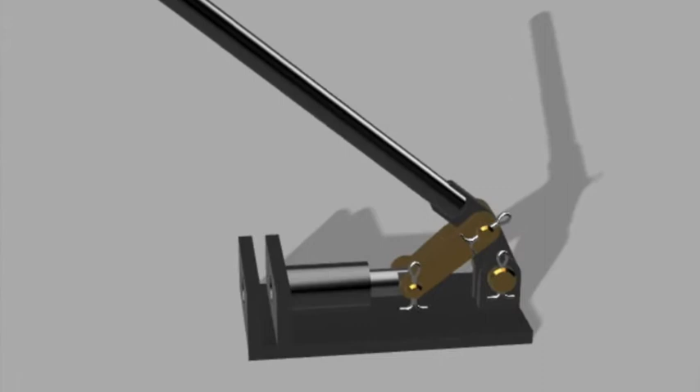To help us demonstrate this, over the series we're going to be modelling this punch mechanism, and in this video we're going to be looking at how to extrude the complex shape of the split pins.

We're going to start off by sketching our shape that we want to extrude. So we're going to select the XY plane. You can see by the grid on the background which plane we're looking at. So there we go, that's selecting the XY.

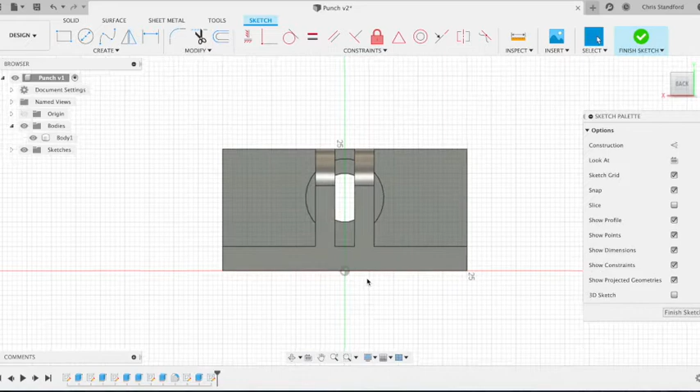For this split pin we're going to draw a 2mm diameter circle. Because it's such a small item we're going to zoom in so we can see it better.

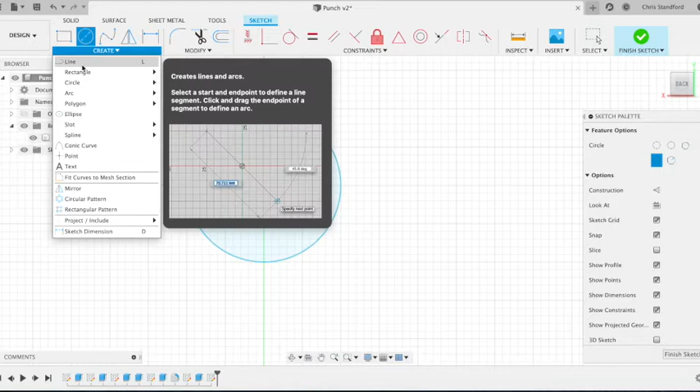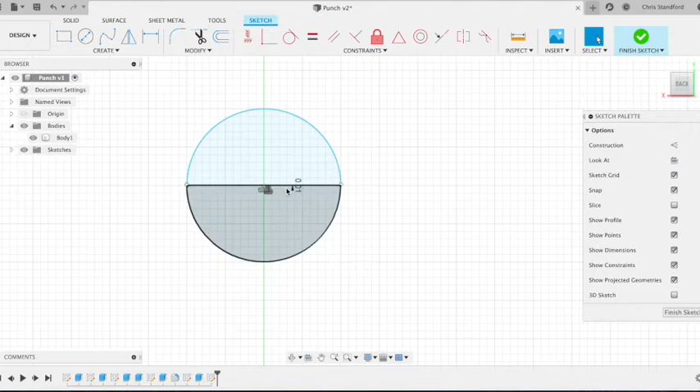And then we're going to split this circle in half. Once we have two semicircles, we're going to offset that center line by a very small amount, so we're just going to go with 0.01, a very small amount. And we're going to do the same on the other side. So if we offset again, we're going to offset that one, and we're going to go 0.01 on the other way now.

And we can finish the sketch, and what we'll have is these two slightly less than semicircles, and they're the bits that we're going to extrude.

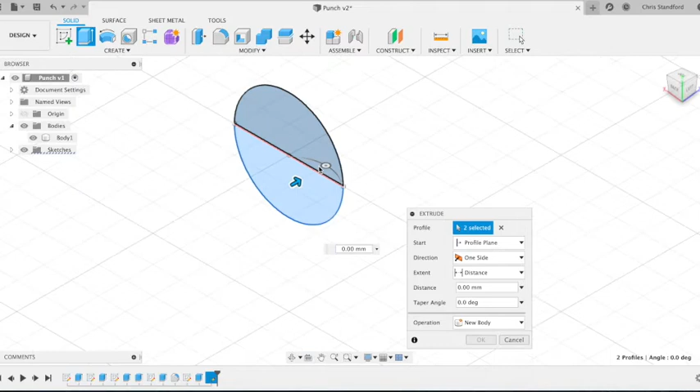We're going to extrude this shape to 10mm, and when we do extrude it, we're going to make sure that we extrude it as a new component, not a new body. A component can be moved, interacted and joined with other components, a body can't. So it is important that this is a component, not a body.

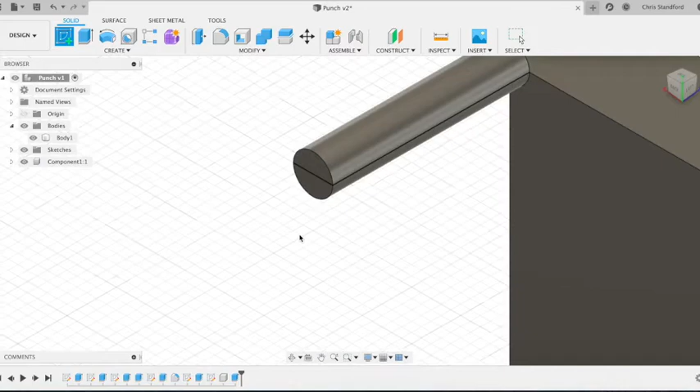Next we're going to create a path for our next extrusion to follow. So we're going to create the head of the pin. We're going to create the path on a perpendicular plane, so we're going to use the YZ plane, and we're going to zoom in nice and close to our pin so we can accurately draw a path for our extrusion to follow.

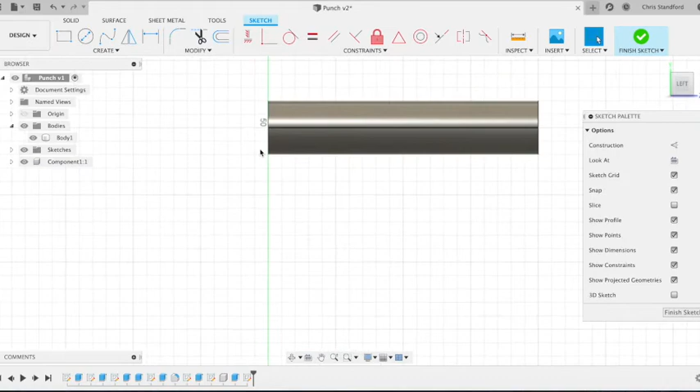If we zoom in, we can then use the more accurate grid to ensure we've got a symmetrical path using the grid. But for this shape we're not going to close it up, so we're going to end it there.

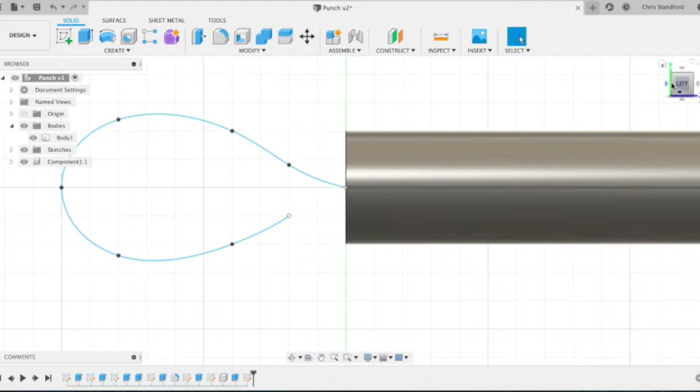We can then choose an isometric view to see the model in 3 dimensions, and we're going to extrude one of these semicircle faces along the line.

So we're going to select sweep from the create menu. The profile has already been selected, so that's the profile, the face we're going to extrude, and then select path, which is the line we wanted to extrude along. Check that it says operation join, and then that one is okay.

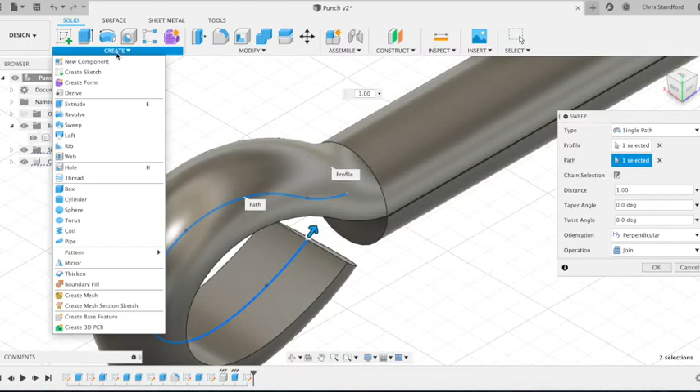Next we're going to loft the two faces, so it's that face and that face, which means it'll automatically create that join between those two faces there. So what we've got now is our continuous shape for our split pin.

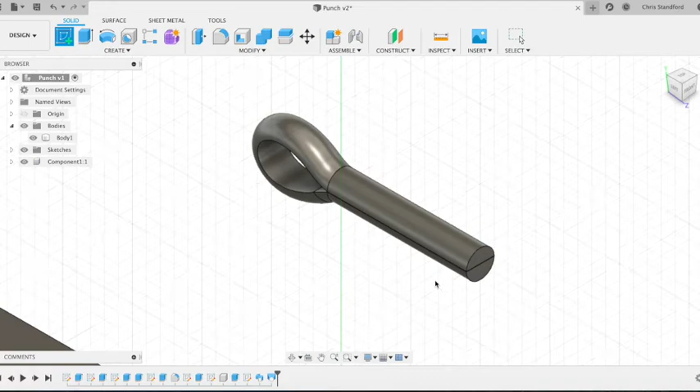There's 2 new ways we've looked at of creating a 3D extrusion. One is the sweep command, which follows the path, and the second is the loft command, which allows us to create a 3D solid between 2 faces.

Next we're going to create a line for our next extrusion to follow, which will be the split end of our split pin.

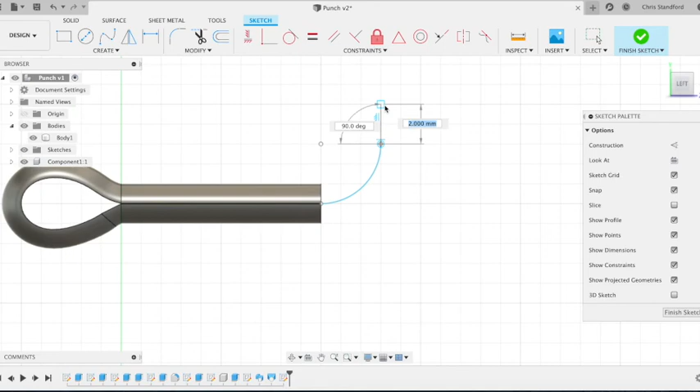We can then use the sweep command again to extrude that surface along that line. Ensure the operation is join and then click OK, then repeat the process on the other side.

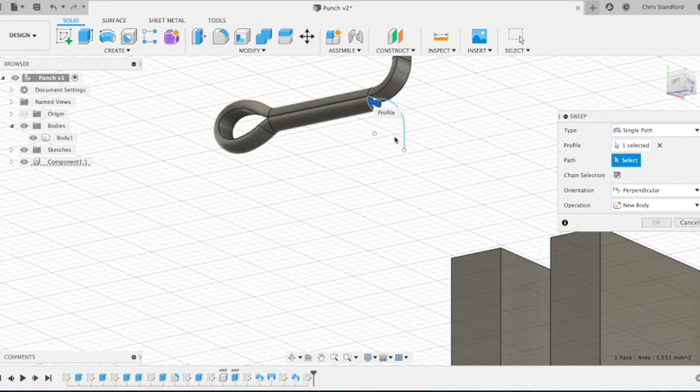I can then name the components and give it an appropriate material.